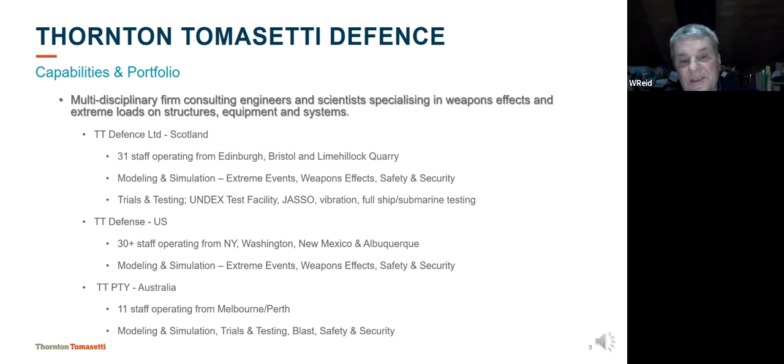In Australia, Thornton Tomasetti has a small footprint at the moment. We're potentially looking to expand that over the next couple of years, especially in relation to defence and shock testing. 11 staff operating out of Melbourne and Perth. Again, the capabilities we're developing or bringing here to Australia will be in modelling and simulation, trials and testing, air blast, general survivability, vulnerability, and also safety and security.

Okay, so look, I guess what I'm going to talk about a lot today is the shock testing of equipment and systems. I thought what I'd do just before I launched into that is just to give you a brief overview of underwater explosions and the effects they have on naval platforms.

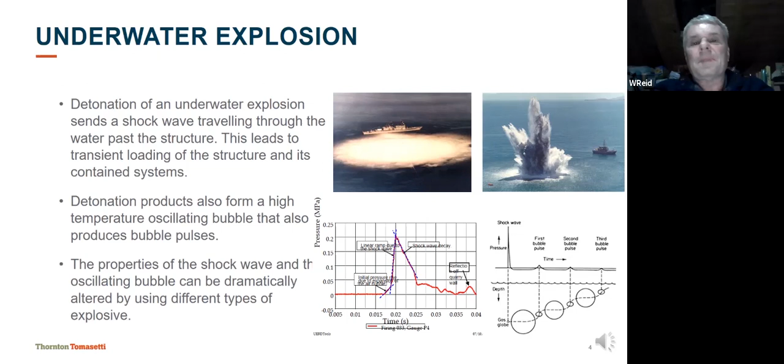So if you have a mine, or it could be a torpedo or even a bomb that might miss its target and land in the water, when that bomb detonates, the explosive burns very quickly. In fact, it detonates, produces a shock wave, and that shock wave gets transferred into the water. If you look at the bottom left picture there, that's a typical pressure profile you'll get from an explosive charge when it detonates in water.

That shock wave, as it moves through the water, if it passes a sensor, that's the type of response you'll get. You'll notice it's characterized by a very rapid rise in pressure, up to very high pressures depending on how close or how big the explosive charge is, followed by the decay of the shock wave as it goes past that sensor, and then eventually tails off to the hydrostatic pressure of the local environment. It's very hard to see a shock wave in water.

However, in the top left picture there, if we were detonating an explosive charge next to a naval platform, you can actually see the effects of the shock wave. That's actually a cavitated zone next to a surface ship. When that very high pressure compressive shock wave interacts with the water surface, it actually gets reflected as a tensile wave. And because water can't sustain much in the way of tension, you get that cavitation zone around the ship there. That's what you can see in that top left picture.

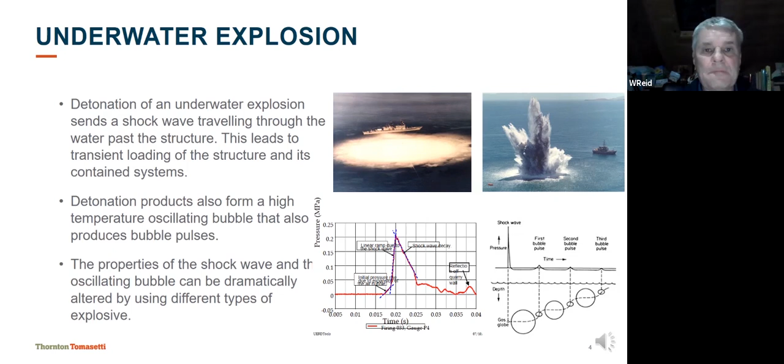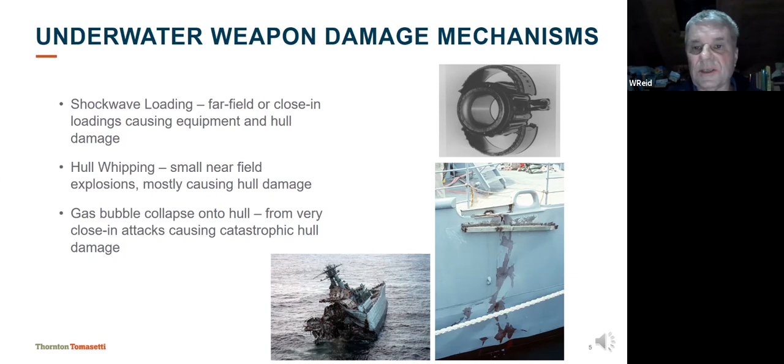And eventually, when that explosive charge gets so close to the platform, you're still getting shockwave damage, hull whipping damage, and you can also get that gas bubble collapsing onto the hull of the platform. The easiest way of showing that - I think I showed this video in the last presentation I did a few years ago, and a few of you would have seen this already, but...

There was video shot of the torpedoing of the ex-HMAS TORRENS back in 1999. That was with a heavyweight Mark 48 torpedo, fired by HMAS Farncomb. It was actually the first firing of a heavyweight torpedo by a Collins-class submarine. So TORRENS was basically anchored in position with a noisemaker inside the ship hull. The torpedo found its way to the ship and then detonated. It's a really good video for showing each of these three mechanisms - the shockwave loading, the hull whipping, and also the gas bubble collapse onto the hull.

So I'll play this video now, and I think there is audio, hopefully you'll be able to hear it. Whoops, hold on. That didn't go well, let me just try that again. Hopefully play the video.

There, if I just take this video back a little bit.

So just before the detonation of the explosive, there's the cavitated zone. That's the shock wave moving very rapidly through the water, typically just under 1,500 meters per second. There's the hogging of the back of the TORRENS as the bubble begins to expand. It sags again as the bubble shrinks, and then that bubble collapses onto the hull of the platform and eventually vents up through the structure.

Now, that's a great video to show in terms of the mechanisms of what happens with an explosive charge. However, I always say it's a lousy video to show what actually typically happens to a naval platform when an explosive charge goes off nearby. A heavyweight torpedo, about 300 kilos of explosive, is actually designed to sink 10,000-ton cruisers or bigger ships. HMAS Torrens was only about 2,500 tons, so it was basically using a big mallet to crack open a peanut in that particular case.

So it's worthwhile pointing out that torpedoes are less likely to be used, and there's only been 3 firings of a torpedo since World War II. I think the first of those was back in the Pakistan-India War, then back in 1982 in the Falklands the UK fired a heavyweight torpedo, and back around 2009-2010, allegedly the North Koreans also fired a torpedo against a South Korean corvette.

But in reality, the biggest threats out there are in fact from sea mines. Whether those sea mines are floating, whether they're tethered, whether they're on the seabed waiting to detonate, or they have rising mines these days which can be triggered acoustically or magnetically, and they can rise up towards a platform. By far the biggest threat to naval platforms is from sea mines. They're effectively low cost, extremely effective. They're a stealth sit-and-wait weapon. As I mentioned before, they can sense a number of ways, acoustically or magnetically, and they can even count the number of ships that go over the top and not necessarily detonate for the first ship that comes through.

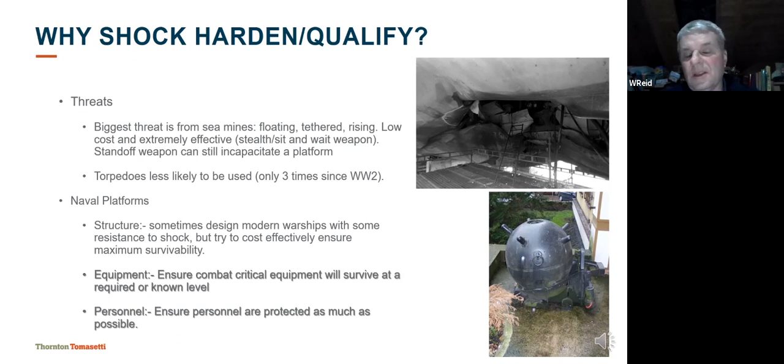Most of this presentation I'll be going through concentrates on the survival of equipment, especially from the shockwave side of things. Also, we can do a fair bit to try and ensure personnel on board a platform are also protected as much as possible.

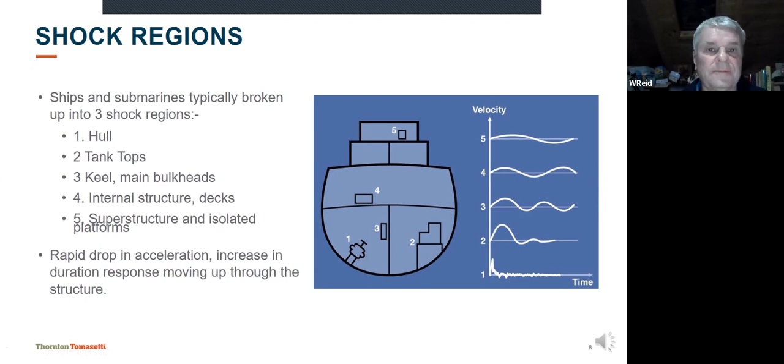Okay, that was a little bit of introduction to underwater explosion physics. The main part of this presentation I'd like to go through is my thoughts about developing an Australian sovereign national shock testing and qualification capability.

Over the years I was with DST, one of the challenging things we always had to look at was the fact that we've generally built platforms from overseas designs, and each of those designs has come with its own shock standard that we had to test against. For instance, at the moment we have Collins class submarines from a Swedish design, and in fact it has a US combat weapon system on board. We're about to build Attack class submarines designed by the French.

In the surface ship space, we've had the Anzac class frigates evolve out of the original MEKO 200 design from the Germans. We've built Hobart class destroyers from a Spanish design, and now we're about to build Hunter class frigates, which evolved out of the UK.

So one of the challenging things we've had in Australia is that we've had quite a mixture of applicable shock standards to test against. When I was working with Naval Engineering and with DST, we tried to bring in the Australian standard, but it's difficult when you've got these different platforms you're building and then maintaining. One of the biggest issues was effectively the question about what is the shock survivability of our platforms at the moment, and often it was very hard to define and quantify.

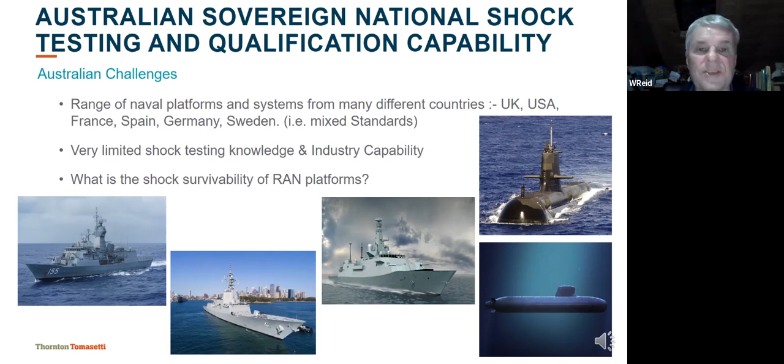In terms of developing this national shock testing qualification capability, what we'd really like to do is raise our current shock testing and qualification capability from what I'm calling, these are my definitions, our tier 1 capability at the moment up to tier 3. The case in point is, for instance, I would assess that the UK MOD at the moment are at that tier 3 level, so we should aim to be at least at that tier 3 level in the future.

We try to ensure that naval platforms built within the naval shipbuilding industry maximise their shock survivability within cost and capability constraints. We need to ensure that we continuously train and develop industry in the importance, significance, and appropriate methods to ensure maximum naval platform shock survivability.

And the most important thing is that when we do all this work, we need to try and feed all this information back into the requirements, the standards, and into Navy doctrine, and that will help us develop improved platform designs.

And that's especially applicable, for instance, with the Hunter class frigate, because we expect that platform design to evolve quite significantly from the first platform that's built through to the 9th platform that's built.

In this presentation, looking at this national sovereign capability, there are 4 areas in this diagram on the right I'm going to concentrate on: equipment and systems shock testing, full-scale ship shock testing, shock standards and requirements, and also the modelling and simulation side of things.

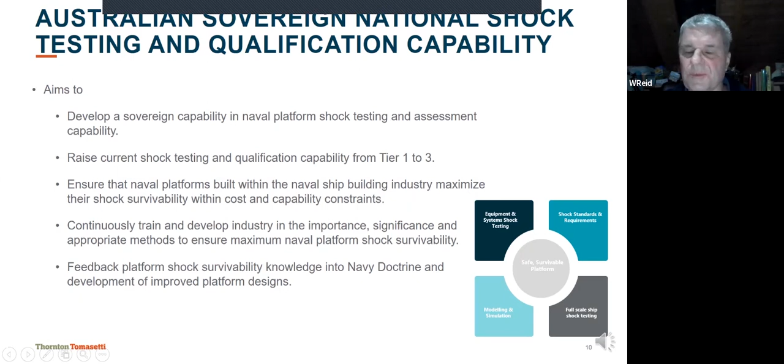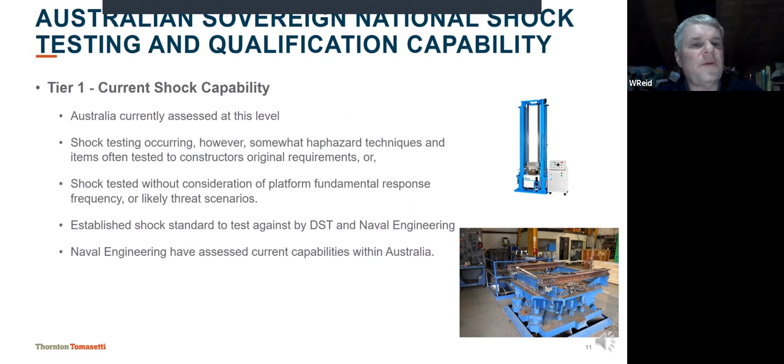Looking at what I'm defining as our Tier 1 or current shock capability, this is where I think currently Australia is. We have shock testing occurring, however it's been somewhat haphazard in the past in terms of the techniques and also the items we've tested, some of this equipment and systems tested on various different types of shock machines. We've often shock tested without consideration for the platform fundamental response frequency or the likely threat scenarios.

If I cast my mind back to the last 10 or 15 years, when we were working at DST with Naval Engineering, we tried to bring in the Australian shock standard, and we did bring it in. However, it was hard to get people to test against that because it was always the overseas standards that was the requirement for all the platforms we were building.

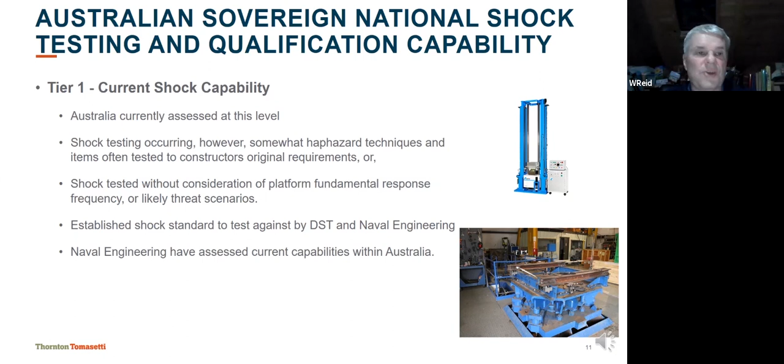I should point out that Naval Engineering did do an assessment of the current capabilities we have here in Australia, so that was quite useful in terms of looking at those capabilities. And in fact, when I looked at those capabilities, that's where I decided, well, we need to have some heavyweight shock testing capability here in Australia, and I'll be covering that in the next few slides.

So from my perspective, what do we need to do to take us from our current Tier 1 level to a Tier 2 level? This is probably something we should be aiming at over the next 2 years.

We need to make sure we've got a range of established and relevant shock testing techniques for industry to utilise, and the appropriate shock testing techniques to achieve the desired levels of survivability. That's not putting any old bit of equipment on any old shock testing machine, because you could get any result out of that. You may end up over testing or under testing equipment in those situations.

We need to look at an expanded set of shock levels for all the Australian platforms, and make sure they're compared against the various operational threat requirements that operational planners want those naval platforms to go through. We also need to consider the ability to perform cheaper, environmentally friendly full-scale ship shock testing, and that's something likely to happen within the next year or two here in Australia.

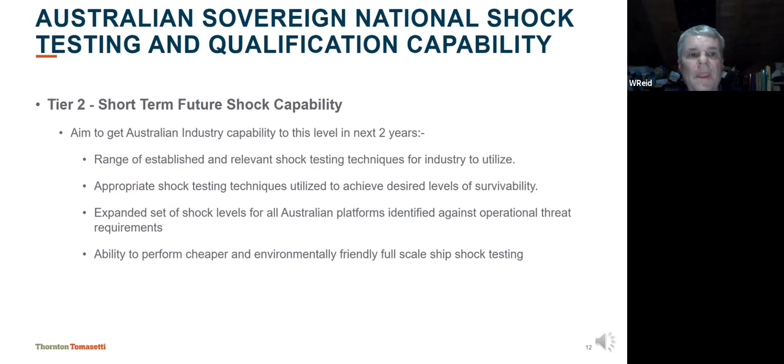I mentioned Tier 3, and I'm thinking this should be our longer term shock capability, with an aim to achieve this in 5 years' time. I look at Tier 3 and would say that that's the capability they have back in the UK, where they test all their platforms.

This is where they have a fully integrated capability of shock testing, qualification, shock modelling and simulation, and also the standards - they bring all of that together. I guess for us, one of the big things we can do in the future is bring in the modelling and simulation. I'll be talking more about that in the slides coming up.

Just quickly dwelling on the modelling and simulation, that's a predominant technique they use in the UK. In fact, with the introduction of modelling and simulation, they may not actually do shock testing in the UK unless there's a requirement. There's such confidence with the modelling and simulation these days, validated and verified over many years, that they have confidence in the UK they can just use those models to assess the response of the platforms.

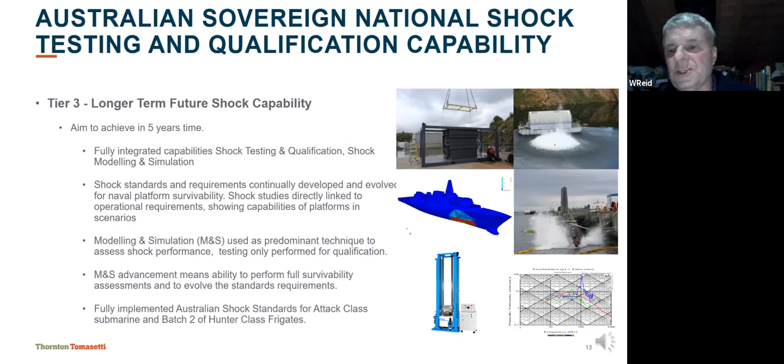With our Tier 3, I think we should be aiming to have it ready to go in terms of the Australian shock standards for the Attack class submarine, and probably batch 2 of our Hunter class frigates, in about 5 years' time. The Hunter class frigates are still hoping to have the first of those platforms in the water towards the end of this decade, about 2028, 2029. So if we can implement this Tier 3 shock strategy by then I think we'll be doing pretty well.

When I talk about these 4 areas that I think we need to consider, the first of these, equipment and systems shock testing, is mainly looking at increasing the number of shock testing types of capabilities we have here in Australia. It also takes into account full-scale ship shock testing.

We've done that a little bit in the past. We haven't done it very well in terms of the way we've done it and the results we've had out of it. We've generally put a tick in the box for the platforms we've shock tested, but a lot of that information hasn't been fed back into our standards, or in fact into any modelling and simulation, which we haven't really been doing.

It's also about expanding the shock standards and requirements we have here in Australia and utilising those a lot more. But the most important part of all of this, I believe, is the modelling and simulation capability that can be brought here into Australia to supplement all of these other 3 areas I've been talking about.

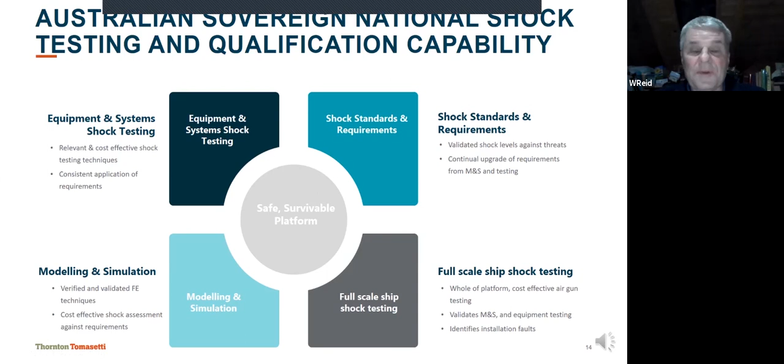The main point in all of this is to make sure we've got safe, survivable platforms. Even though the Royal Australian Navy has been somewhat of a peacetime navy in recent years, there's a fair bit of sabre rattling going on in the South China Sea at the moment. If we're planning to send our platforms into the South China Sea, we need to make sure we've got safe, survivable platforms from that perspective.

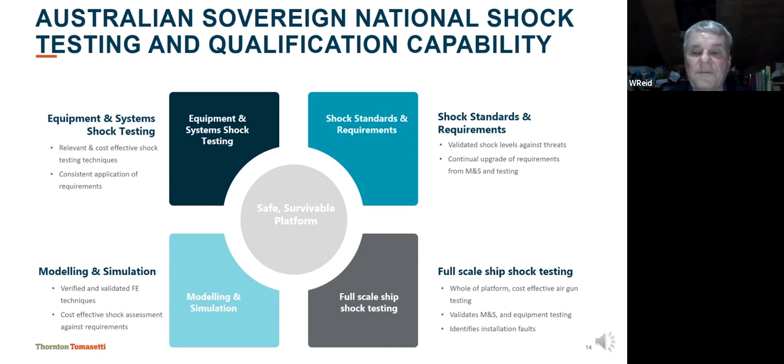Okay, so talking about the first of those 4 areas, heavyweight shock testing. So I mentioned it was probably about 4 or 5 years ago, we'd identified there was a lack of heavyweight and also to some extent medium weight shock testing here in Australia.

So as part of the Hunter class frigate R&D program that DST was working on, we decided to build a floating shock platform here in Australia. We actually obtained the drawings from Canada, which effectively was a copy of the floating shock platform that they have back in the US. That platform has been built and is now located up at the new DST underwater explosive facility up at Nagambie in central Victoria.

It is a copy of the US MIL-S-901D heavyweight platform, so we could do replica shock testing on that platform for people who wanted to test against MIL-S-901D. However, unless we had that platform qualified by Naval Sea Systems Command, it would only be a replica test. Depending on demand, we may move forward in the future to look at shock qualifying that particular platform by NAVSEA.

I guess the other important thing about having that platform up there is that we don't have to do MIL-S-901D testing. We can do any range of testing, whether for various international standards or the Australian standards we have here. Rather than just doing a set test like they do with MIL-S-901D, we put a whole range of instrumentation on that platform and then obtain any result or do any range of shock tests, whether that be testing the capacity of that platform. I think it's about 26, 27 tonnes you can put on board, or whether it could be palletised or shock mounted range of systems and equipment you put on that platform.

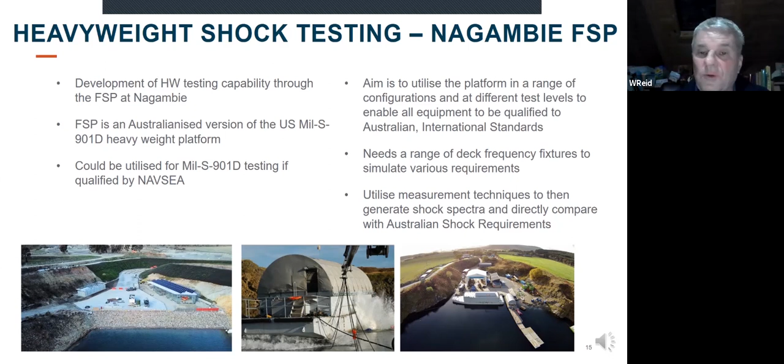On the right there, you can see the Lime Hillock facility back in the UK, but that facility gets utilised basically once a month, and we're hoping that up in Nagambie we can utilise the floating shock platform for something of that same order of magnitude.

For instance, whether that could be for the Hunter class frigate, the Anzac frigates, Hobart class destroyers, or even the Attack class and also the Collins class submarines. We can develop those fixtures and put them on that platform. And I guess we need to make sure that when we do the testing, it's consistent with application requirements.

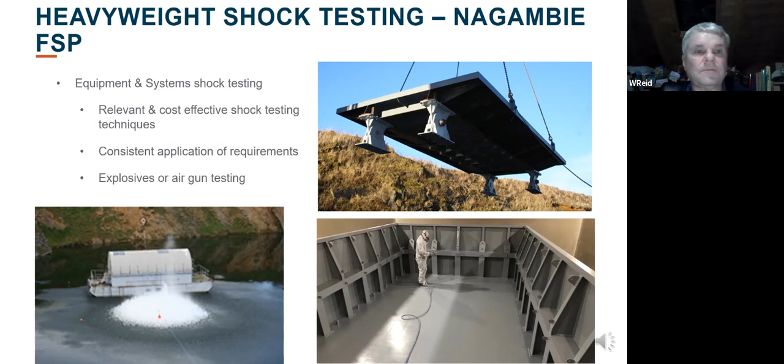Okay, just moving on to medium and lightweight shock testing. From the medium weight perspective, here in Australia, we had a medium weight shock machine. I had a picture of that on one of the earliest slides. That was located up at St Marys in New South Wales. Unfortunately, that machine has long gone. I think it was about 20 years ago that it was decommissioned.

One of the issues I always had with that machine being used for testing was that people said, if we've got equipment of a certain mass—could be over 300 kilos up to a couple of tonnes—let's just test it on the medium weight shock machine at St Mary's, often with no consideration for where that equipment was going to be installed or on what platform.

So effectively it was a one size fits all approach, like they do in the US. In the US, we just shock tested and put a tick in the box if that equipment passed the test. There's been very little medium weight shock testing capability here in Australia. There are various lightweight machines through various test companies, and we're looking to continue to utilise those testing machines.

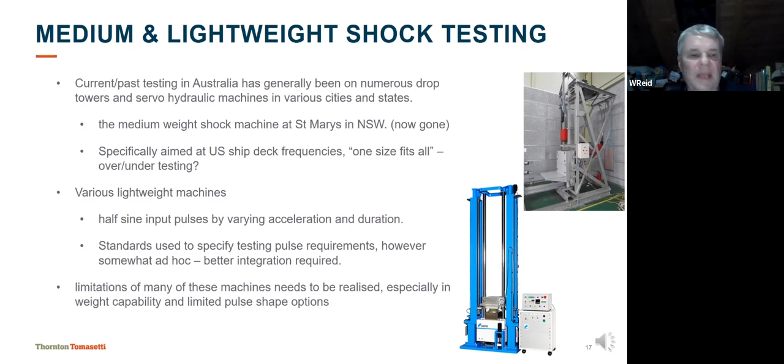With that in mind, it's worth mentioning a new shock testing technology that Thornton Tomasetti have developed back in the UK, and we're looking to bring one of these medium weight shock testing machines here to Australia. It's called JASSO—JASSO is the Mexican god of thunder, if I remember rightly.

JASSO will allow you to potentially test equipment and systems up to about 5 tonnes in weight and about 6 metres in length. It utilises seismic air gun technology. Thornton Tomasetti have a patent on the use of seismic air gun technology for full-scale ship shock testing, and also for the JASSO machine doing medium weight testing. We're going to bring that capability here to Australia.

One advantage of JASSO is that because it uses seismic air gun technology, it effectively replicates the response you'll get on a naval platform in terms of the shock load and the release of energy through the structure as the shock load stops, and also the pulsating gas bubble loading you might get on board a naval platform.

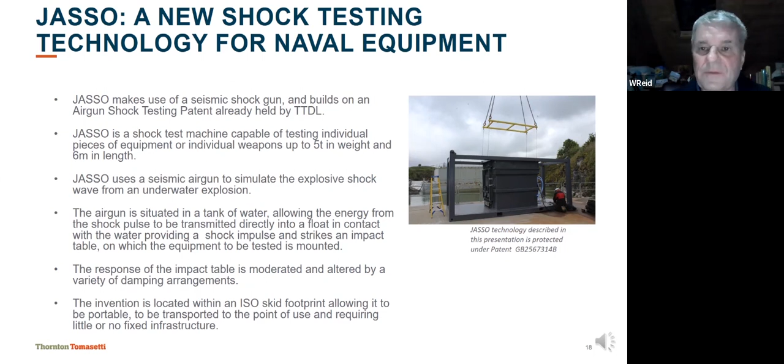To give a quick overview of air gun technology for those who don't know about it, the oil and gas industry developed seismic air guns. They put about 50 of these guns, tow them behind a ship for oil and gas exploration, and detonate them. The guns are just full of compressed air—you fire them electrically through a solenoid—and then they look at the acoustic pulse produced, how it reflects off the seabed, to determine whether there are oil and gas reserves.

Thornton Tomasetti took this technology and adapted it to shock testing of naval platforms and equipment. In this video, you can see two seismic air guns, about the size of a 9 kilo gas barbecue cylinder, though they weigh significantly more. When you fire these guns, you'll see the outflow of air, which is like the pulsating gas bubble you get from an explosive charge. Let me play this.

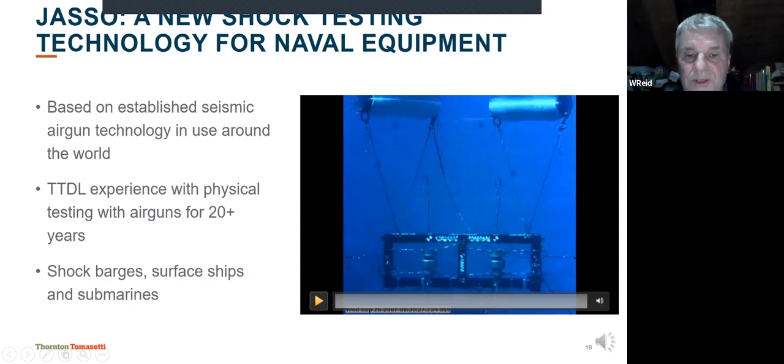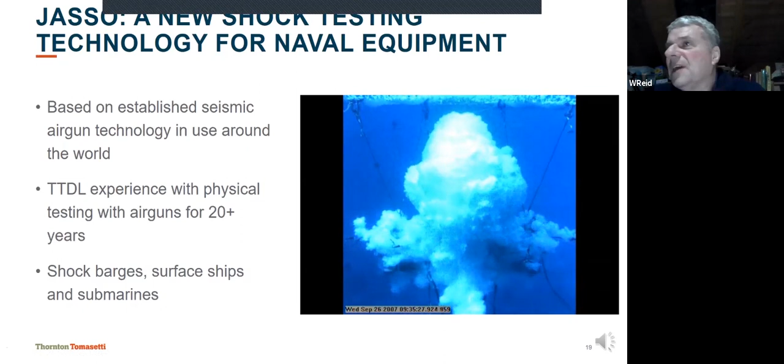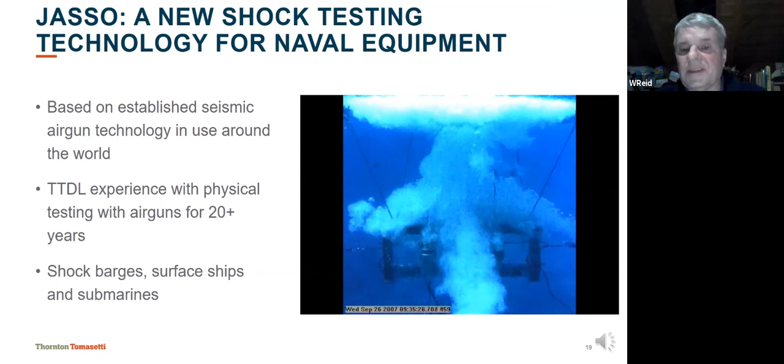There's the firing of the guns, the two gas bubbles, and you'll notice they coalesce together as they begin to shrink. That's effectively the same response you'd get if an explosive charge were very close to the underside of a naval platform, with that bubble getting attracted to the hull of the platform in that situation.

So a little bit more about JASSO. On the top right here, you can see the seismic air gun inside a water container. Above that water container, you have a float with a platen on board.

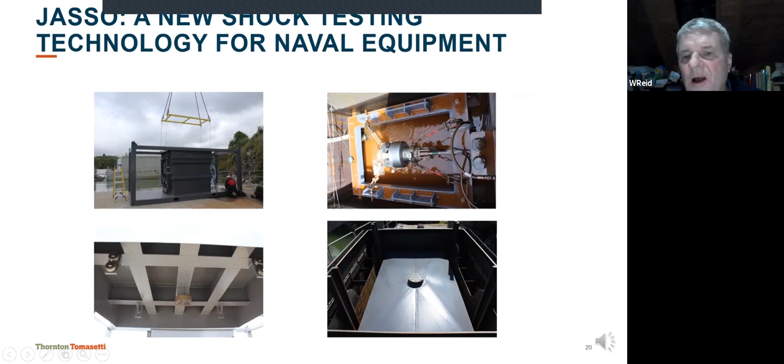So when the air gun fires, it forces this float up. That platen on the float then interacts with the shock table, the platen underneath the shock table, and that's how we transmit the shock load from the air gun into the equipment systems that might be sitting up on top of JASSO. You can change the duration and intensity of the loading by adjusting the pressure inside the air gun. You can even put other gases inside apart from compressed air to change that response, or put different materials in between these platens to change the loading on the impact table.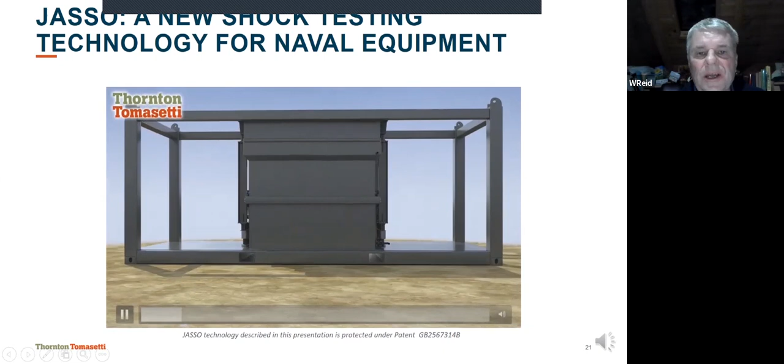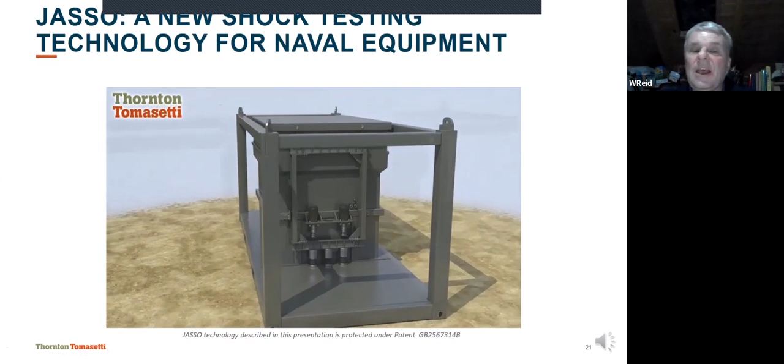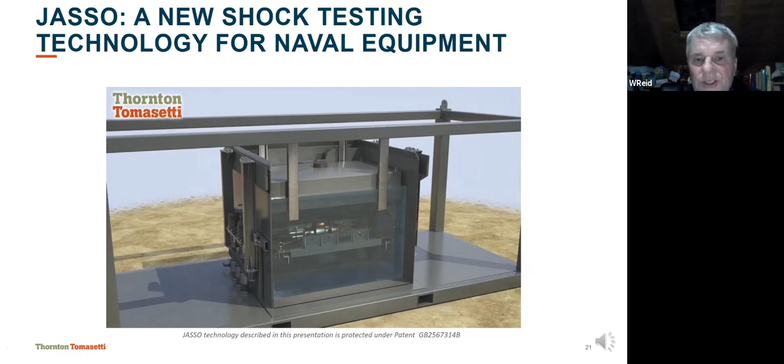Here in this box in the center is JASSO. JASSO is on a 20-foot ISO skid, so you can put this skid anywhere in Australia, whether testing on an explosive range or taking the JASSO machine to your facility for testing of equipment and systems. So there's the air gun, full of water, there's the float, and there's the shock table above it.

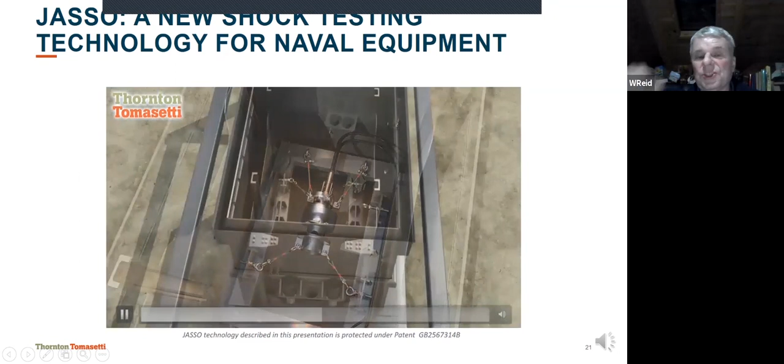On the side here, we have some restrictors that you can adjust to change the restriction of how far the table moves.

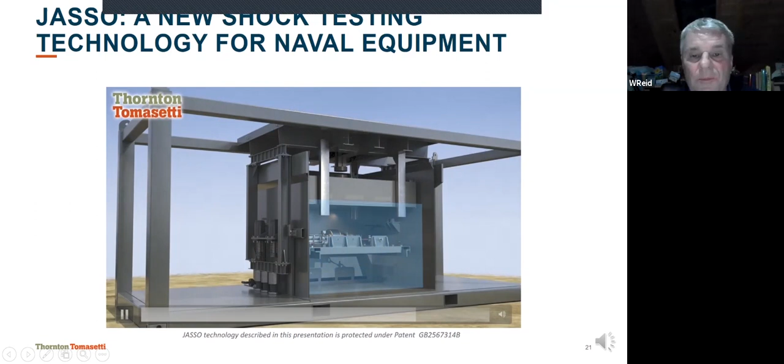Full of water here, fire the air gun, you see the float move up, impact the table, and then the table comes back down. You can have a couple of bounces out of that, which will replicate, for instance, the response you'll get on board a naval platform. There are also limit springs and stops here which you can change and alter to adjust that loading and duration of loading.

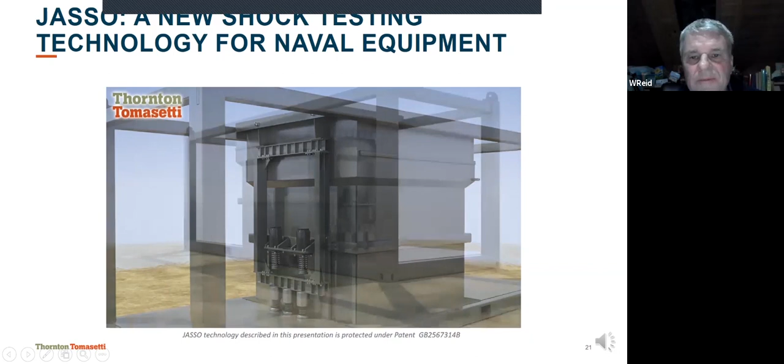Okay, the second area I'd like to talk about is full-scale ship and submarine shock testing with air guns. I mentioned earlier that Australia's done a number of shock trials in the past, explosive shock trials on some of our naval platforms.

Back in 2003, we shock tested HMAS Rankin, the last of the Collins-class submarines. In 1999, we also tested our Minehunter Coastal, and earlier than that, we did some tests on the Minehunter Inshore. All of those tests were explosive tests where we basically took that platform out into blue water.

We had a number of support vessels required to deploy the explosive charge. Often the platforms were out there—in the case of Rankin, for a month and a bit at sea. You generally do about one explosive firing a week. Lots of logistic costs, but probably the largest cost was associated with the environmental impacts. We had to have spotters on the water and in the air, making sure the area was clear of mammals and anything else we didn't want in the way of the shock wave produced by that explosive charge.

So it's quite a costly process for shock testing with explosive charges. Potentially one of the options we have in the future, and it may be the only option because of the environmental impact, is to use seismic air guns to do full-scale ship shock testing of naval platforms.

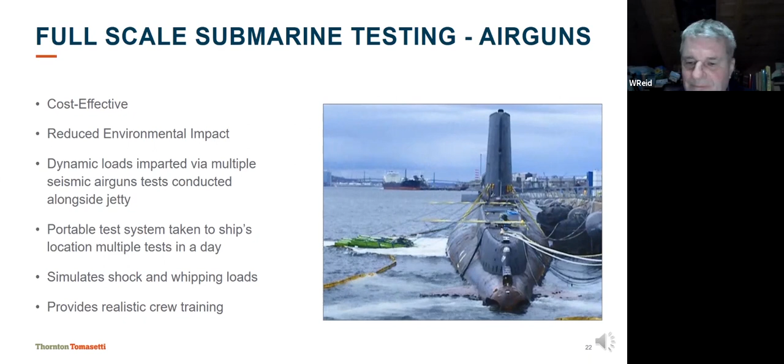So as you can see, quite a severe loading on the hull, in fact a lot of hull and shock whipping there. So you can adjust the loading with the air guns, moving them further away to ensure there's no hull damage to the platform.

Most importantly, the air guns replicate the same resonant frequency response you get on that platform as an explosive charge does. To this point, the UK has mandated using seismic air guns for shock testing any of their new platforms, and they also use seismic air guns for heavyweight shock testing against their barge.

I showed you that shock test the Canadians did against the Oberon class. They recently did one of their frigates over there in Canada. The US Navy has also used air gun testing against some of their platforms.

Here in Australia, it's very unlikely we'll be allowed to do any more explosive charge testing in blue water, simply because of the environmental effect. So really the only alternative for full-scale shock testing in the future is to use seismic air guns.

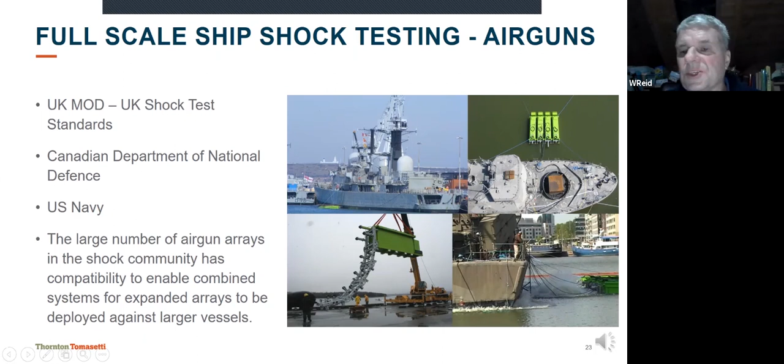Okay, the third area I'd like to highlight is modelling and simulation, and this is probably one of our biggest opportunities here in Australia. We need to think seriously about developing that capability in numerical codes in order to accurately assess the capability of our combat platforms.

So there's many modelling and simulation codes out there, however there's only a very small number that have been fine-tuned for doing shock loading assessment, and many of those codes have never been validated against shock loading and also rapid or high loading weapon events.

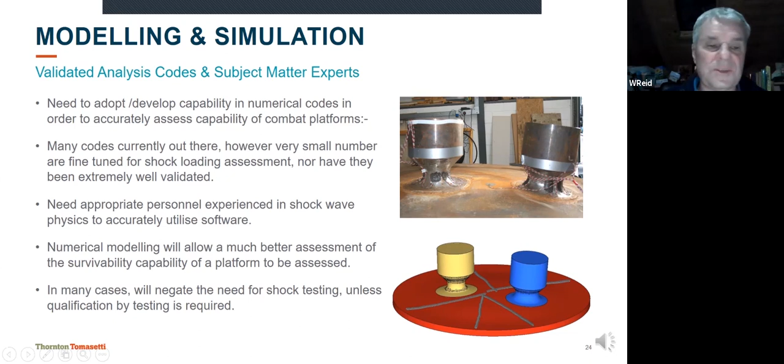Here's a little bit of chance to advertise for Thornton Tomasetti. They've been working with modelling and simulation for almost 40 years now. They've actually developed their own specialised code called elastoplastic shell analysis, the EPSA code, and also the non-linear fast explicit NL flex code. All of these codes have been validated and verified over about 30 or more years against the testing Thornton Tomasetti have done over all those years.

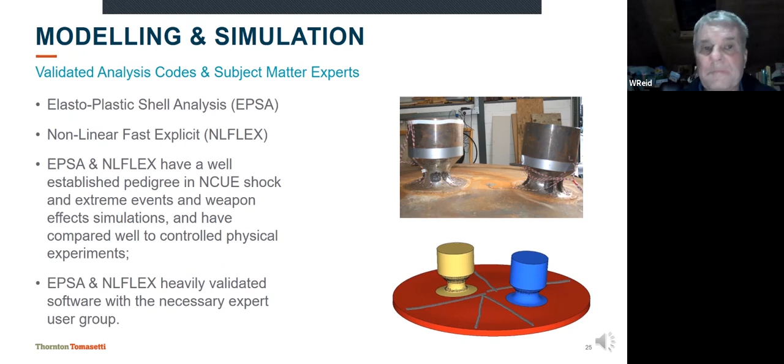The advantage with modelling and simulation is you can have full platform models of all your current platforms, and that's what's happened back in the UK. Thornton Tomasetti looks after all the full platform models for the UK Royal Navy, the Type 26, similar to our Hunter class frigate, the Type 23, the Mine Countermeasures Hunt class, the Sandown class, etc. These are full detailed structural models, also with a lot of the equipment and systems modelled on board down to a lot of detail.

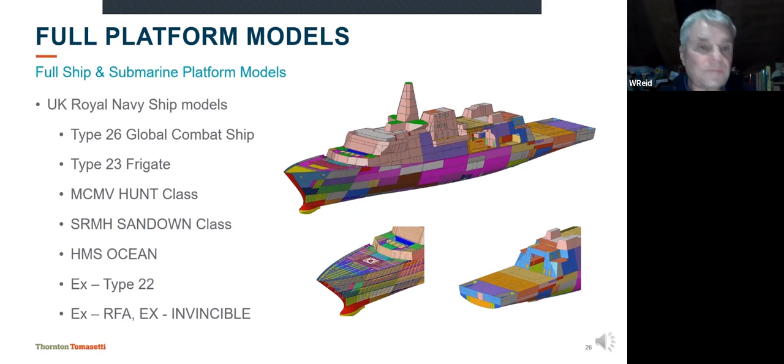Apart from surface ships, they've also maintained the submarine platform models that the UK MOD currently have for doing all their modelling and simulation of the submarine responses.

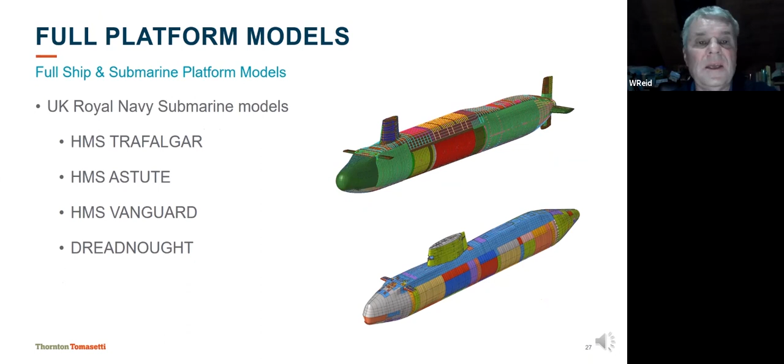If we're thinking about this in Australia to get up to that Australian Tier 3 capability, we should be considering trying to develop full models over the next 5 years of both our new platforms, the Hunter class and the Attack class submarines, but also considering there's going to be a fair bit of refit for the Hobart class destroyers, the Anzac frigates, and especially the Collins class submarines.

The advantage with these full ship models is that you can look at various scenarios of how the structure of those platforms could be changed, different equipment and systems that might be put in different parts of the platform, and then make an assessment of the overall survivability of that platform in the future.

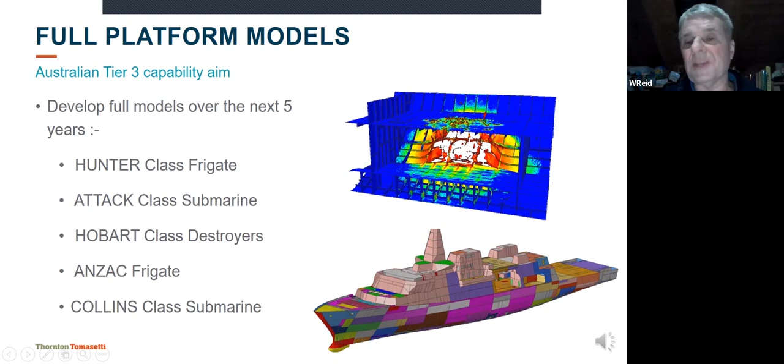I should point out, it's not just the elastic response that these simulation models can do, it's also the plastic deformation and also the fracture and fragmentation, as in the top picture here, which shows a close-in weapon detonating against a surface ship. You can see the fragmentation and also the plastic deformation taking place in that particular hull section.

The modelling and simulation can also be used for a range of other things, such as supporting small and medium enterprise equipment suppliers and advising them how that equipment might need to be modified to survive the shock levels on a particular platform before they've manufactured it, talking with equipment suppliers, weapon systems, bespoke mounting, looking at different types of shock mounting systems.

Thornton Tomasetti, for instance, have developed a new shock testing mount called pumpkin mounts, as part of the development of shock protection systems.

It can also be utilised for air blast, fragmentation and warship in-harbour safety cases. For instance, there's a requirement these days, if you're visiting an overseas country with your warship, they want to know the potential effects of that magazine going up and damaging the surrounding infrastructure. So the modelling and simulation is being used for a whole range of efforts there.

It's worthwhile pointing out the bottom picture here, for instance, shows the detail you can go down to. These are full platform models where you can model any equipment and system and its response, and also the components as part of that equipment and system.

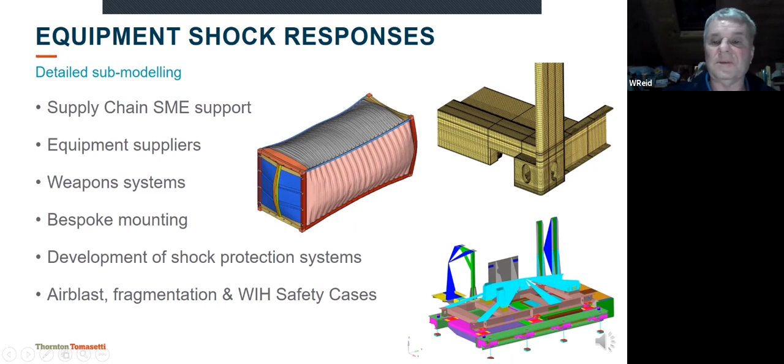The final thing I'd like to talk about is shock standards requirements. If we want to get up to the Australian Tier 3 capability, we need to make sure that we can compare and assess any of the international shock standards with our Australian DEF(AUST) 5000 requirements, which means we'll also need to continually evolve the standards requirements. They do this in a similar manner in the UK, where they have the UK MAP requirements.

Modelling and simulation is an important part of the evolution of those standards, as is the equipment shock testing. Basically, use modelling and simulation as an input to your standards and shock requirements, and continuously evolve those standards over the years. That's something we haven't done here in Australia.

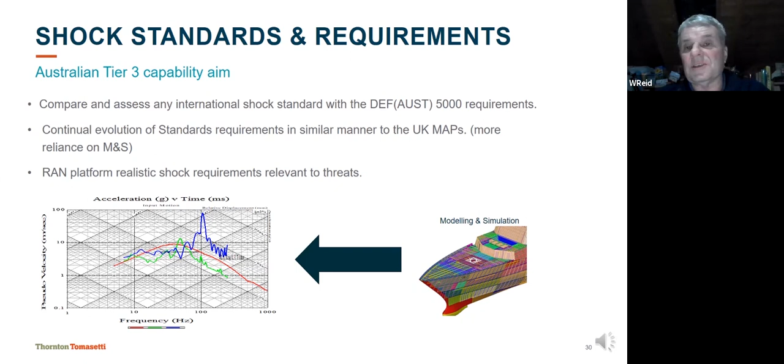For many years, I think I wrote the standard naval shock standard back in the late 90s, and it's basically sat like that for many years. But we should be looking to evolve that standard in the future, especially utilising modelling and simulation, and also the testing capabilities that we have.

One of the important things we haven't done much of over the years is regular industry and academia training programs. We should be covering the underwater shock loading theory, shock testing qualification, modelling and simulation, shock standards, and how we apply all of that to Royal Australian Navy platforms.